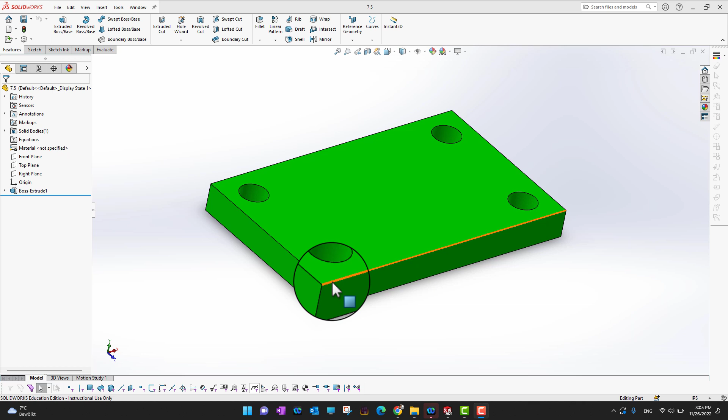Let's go into SolidWorks and see how it works. Suppose we have an example part. I'd like to go into the top view. If I want to cut it from top to bottom, you're gonna see the right and left parts are identical. Or if I cut it from left to right, the top and bottom parts are totally identical. So the thing is, if the parts are identical or there is some symmetry, why do I need to draw all of those parts?

If you use the mirror, it's gonna save you a lot of time. You can just make a sketch of a quarter of this body, and then make the mirror of this sketch and extrude that. Although this is also possible, it's not very good practice. We always try to make our sketch as simple as possible. So let's go and draw a quarter of this part, and then use the mirror command.

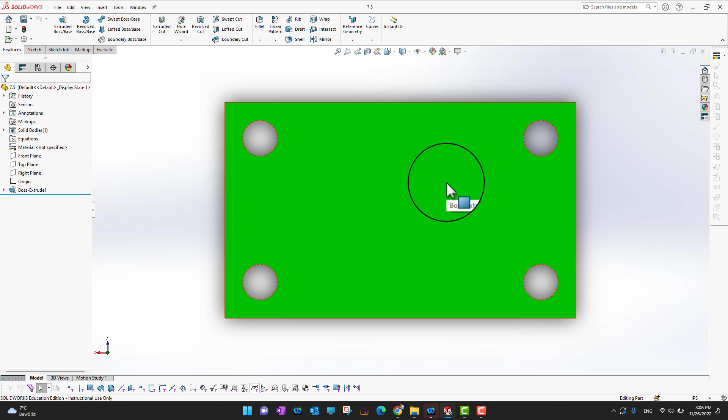What I'm gonna do is start a new part and draw a quarter of this part. I'm gonna go into the front plane, start a sketch, and then draw a rectangle.

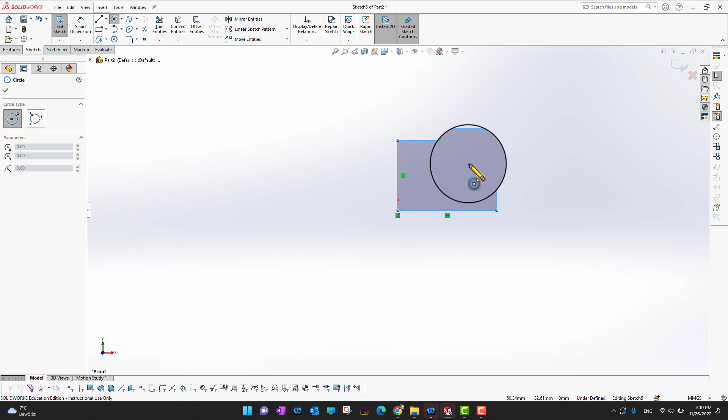And I'm gonna draw a circle here. If I want to give dimensions, from this side till this side, I could say this is 30 mm, and from this side till this side, let's say 20 mm. And if I select the circle, I'll call it 7 mm.

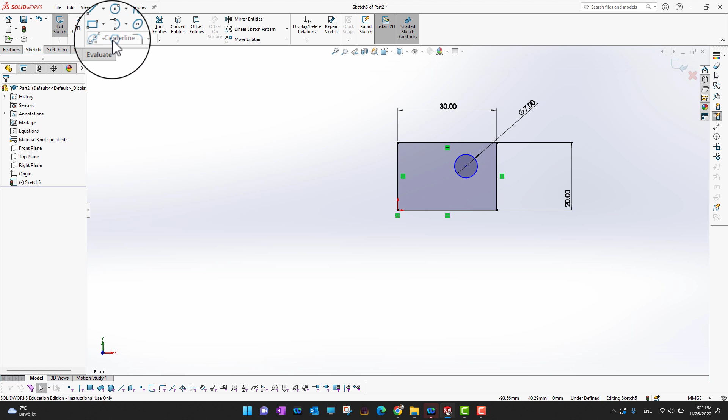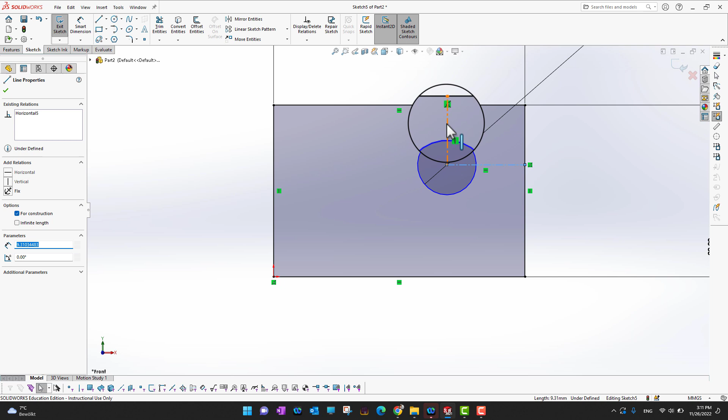There's one other thing. I'd like to draw a center line from the center of the circle to here, and another center line from the center of the circle till here. Next I'll select this center line, hold the control key on my keyboard, select the second center line, and make them equal.

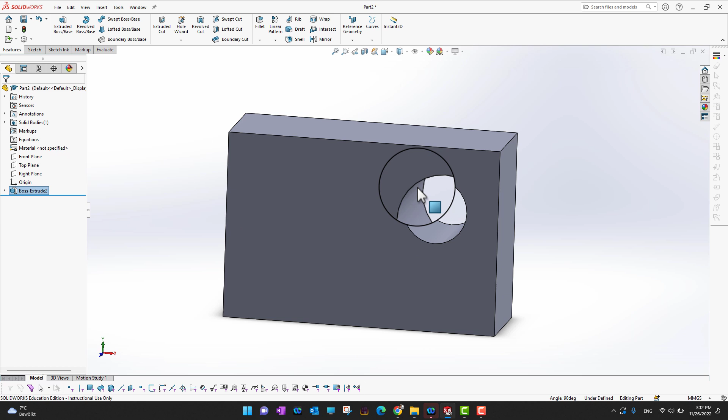In this way I would have the circle at an equal distance from both sides. Then I'm gonna go into the features and extrude the feature 10 mm, and it's fine for me. I'm gonna go and show the front view. So this is the quarter part of the body which we already saw at the start.

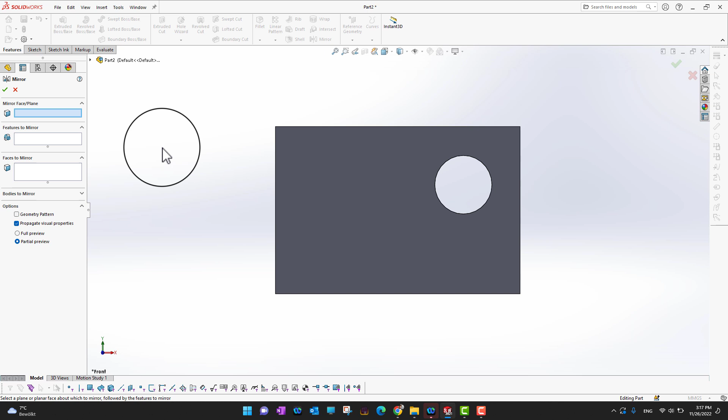Now we are gonna apply the mirror command on this body. For that, we need to go into the features, and in the ribbon section you can see there is an option mirror. When we're in the mirror command, it's gonna ask us automatically what face or plane we want to choose, and then it's gonna mirror the body with respect to that face.

Suppose I choose this face, or it's up to you—we can just choose the fundamental front plane, top plane, or right plane. In that way, it's gonna make a mirror on the other side. But right now it's in feature to mirror, so it's gonna just mirror the feature.

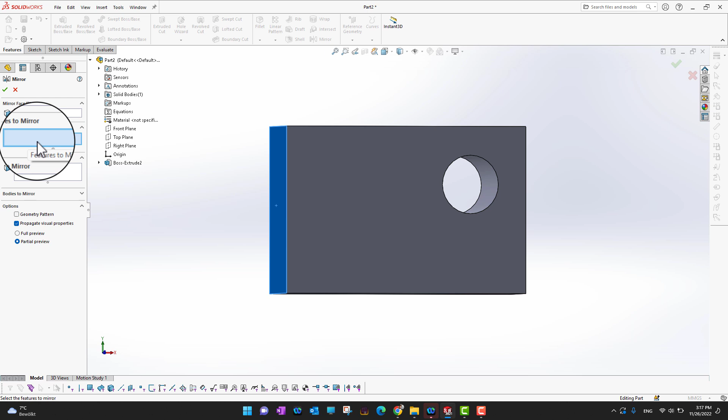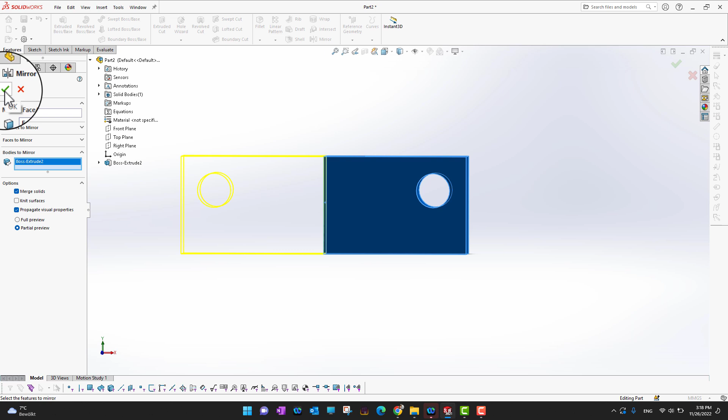I'm not gonna mirror the feature, I'm gonna mirror the whole body. So at the bottom you can see there's an option, bodies to mirror. I'm gonna select this body, and you can see the body is gonna be mirrored on this side. I'm gonna check the green check mark. In this way, we can mirror the whole body.

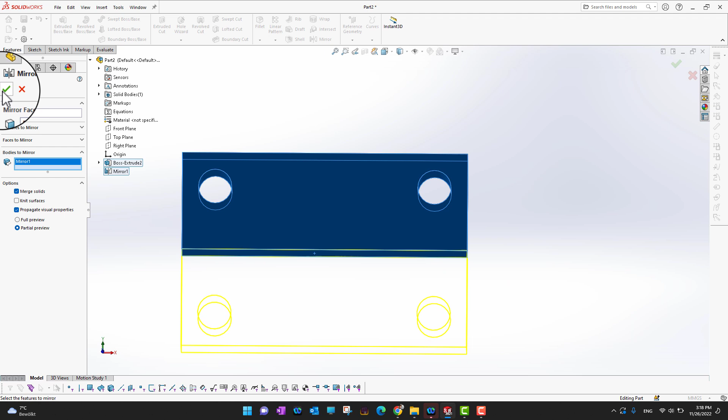So I'm going to go back into the mirror again, and I need to choose a face or plane. I'll choose this face, and automatically it brings you into the features. But we are not going into the features, we have to go into the bodies and select the body. This way, it's going to mirror the whole body on the downside as well. We'll see by this view. So as you can see, we are already there from where we started this video.

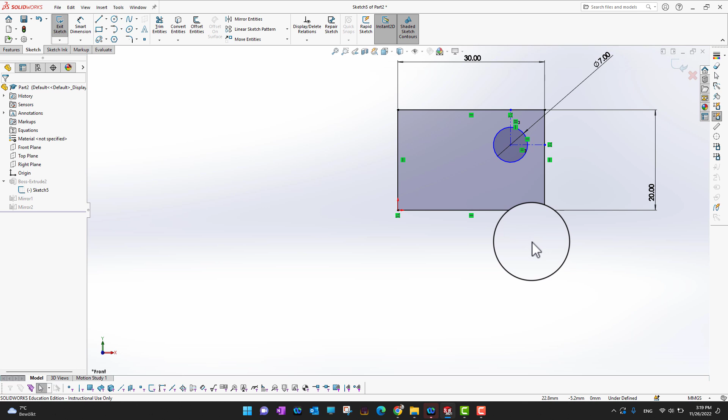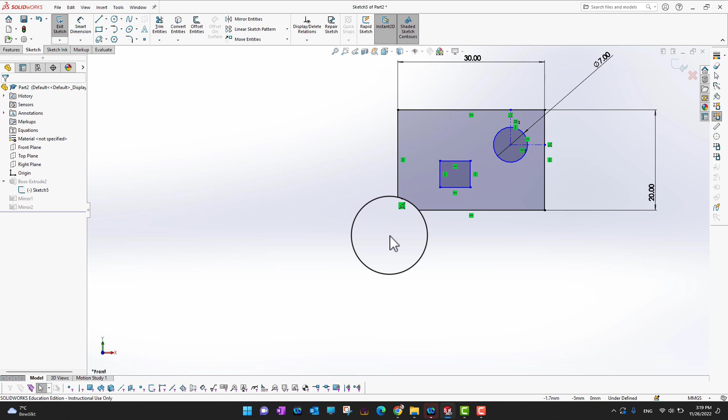If you don't like anything or want to modify the sketch, we can go and modify it. Suppose I want to have a rectangle here. I'm going to exit the sketch. Look, the rectangle is mirrored on all the bodies which are mirrored from the primary body. So in this way, you can modify the sketches and see the result using the mirror. Our sketch is really simple - we have just a quarter part of the body and everything else we have just mirrored.

So what if I want to mirror this body again? I'm going to go into the mirror, select this face, and then select the whole body, and this way I can have another mirror of the whole body.

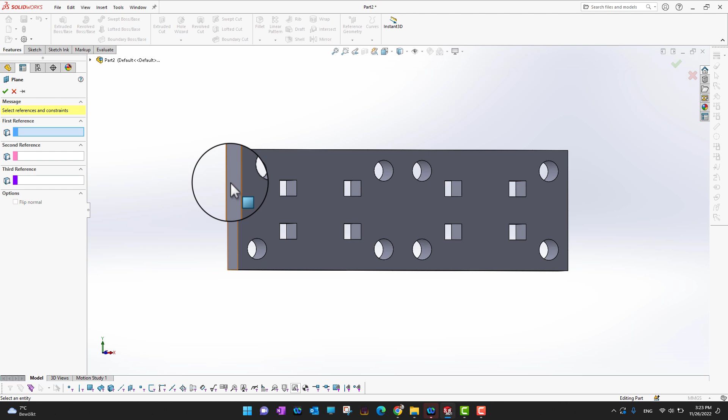As we're already in the mirror command, I'd like to show you how to use mirror for a feature as well. Suppose we go into the front plane, top plane, right plane - no, that's not going to work for us. So what we can do is go into reference geometry and create a plane. For the plane, I need to select this face and then this face. This way we can have a middle plane here. Then I'll click the green check mark.

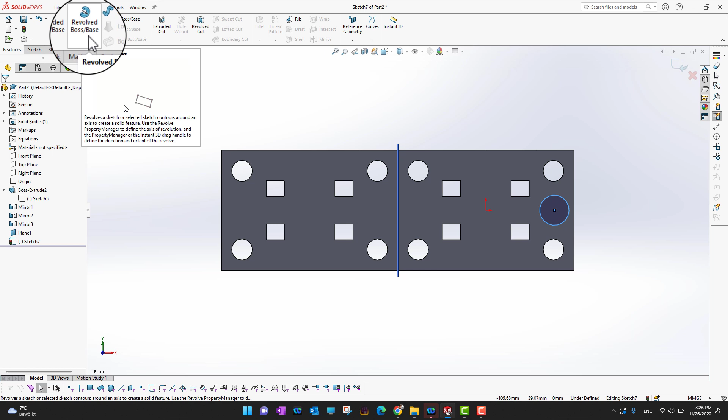Then I'm going to select this body, go into the sketch, and sketch a circle here. Then I can go into features and do extrude cut. I'm going to cut this circle, select 5mm for this, and click the green check mark. So in this way you can see I already have a circle here which is extruded cut.

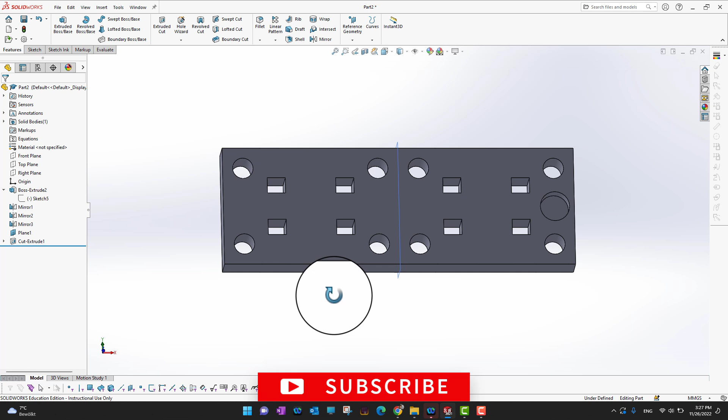So I'm going to go back into mirror again and select this plane which I already selected, then go into features to mirror and select my feature, this one, and it's going to be mirrored automatically on the other side of the plane. I just need to click the green check mark. Look, this way I can add a feature using mirror as well.

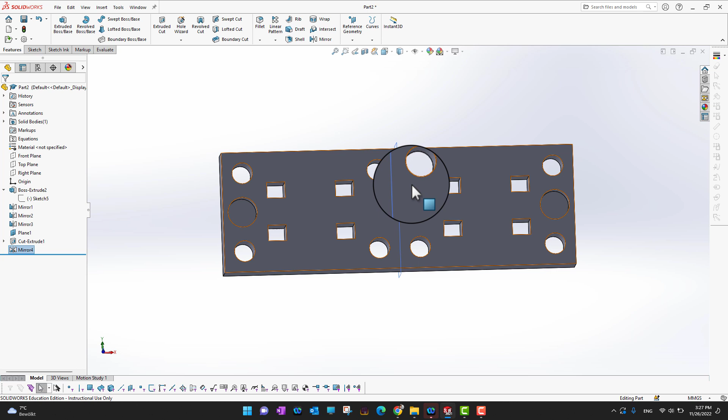So in this way you can use the mirror command for features as well - you can mirror one feature, multiple features, or the whole body, and I'd say this is a really powerful tool which can save you a lot of time.